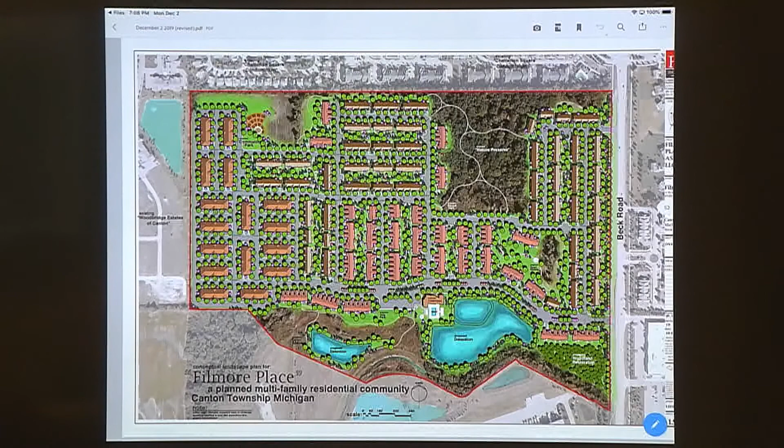There are many wetland areas that are proposed to be modified or filled, and therefore a permit will be required from the state. There are many additional wetland areas and densely wooded areas that will be preserved as part of the PDD benefit. At the time that the site plan is proposed, there will be a comprehensive tree survey for the site.

The last item in our letter that I want to note is the fiscal impact. The project sponsor calculates that the estimated value of each unit will be about $160,000 per unit. Our initial calculations of the impact indicate that it will have a relatively neutral impact on the general fund, library fund, police and fire fund, and road improvement fund.

In summary, our recommendation for the preliminary PDD is a recommendation of approval, and we'll be happy to take any questions that you have. Thank you.

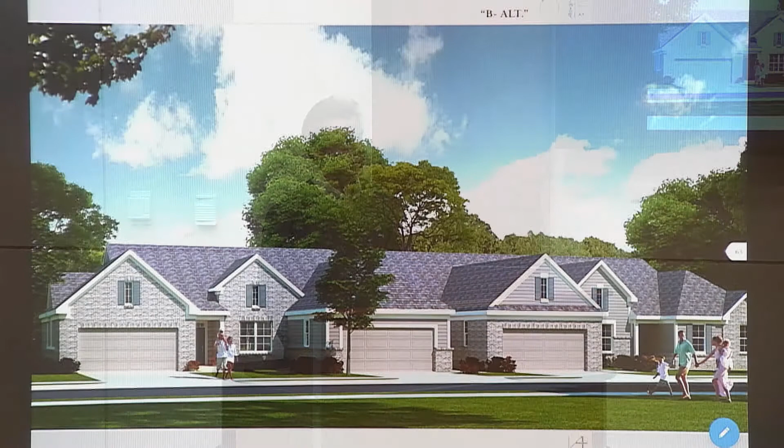You planning any of that up front, or you're just saying you'd look at it if somebody came in and wanted something like that? That's something we'll look at. Universal design, it's something that when you target that market, is an appropriate approach. So as we look at the plans and fine tune them for final design, we'll look at that type of thing.

And these are all ranches, correct? We have, can you just quickly go through the various renderings that we did? Maybe start with the clubhouse, and I'll briefly give you an overview. Two-story buildings too, though, so they're not all ranches. Correct. This is the clubhouse.

This is as you come in off the main drive off of Beck Road. This is going to be the main amenity center for the project. It's going to have a number of different uses within: social room, cyber cafe, lounge. All of the leasing, offices, management, maintenance will be in this large exercise fitness area, yoga on demand, state-of-the-art facility. You can see as far as the architecture, we tried to create different interest along the elevation with different window types, head detailing, gables, and that's carried through on the architecture for the other buildings.

Can you maybe go to one of the ranch buildings? This is one of the buildings you'll see as you come into the project. Most of the initial units along Beck Road are all ranch, and that progresses as you go west back into the project. If you could maybe flip to the next one.

This is our two-story building. This is more in the back of the project, to the west. This has a mix of what we call stacked ranch and townhouses. Predominantly, the center of the building has back-to-back townhouses, but there are stacked ranch in the very center of the building, and then stacked ranch up above the garages, carriage units on the ends of the buildings. So yes, the project is predominantly ranch, but we do have some two-story townhouse units in the rear.

All of the units have two-car garages on the basic ranch units. In this building, we have one-car garages and then two-car garages on the front end corners of the buildings. And as was mentioned, we're looking at least 50% brick. The goal here is to have a maintenance-free, durable product throughout the project. The square footage of the units will range from 1,100 to 1,200 square feet. That's the target market we're looking to hit in terms of the lease-up.

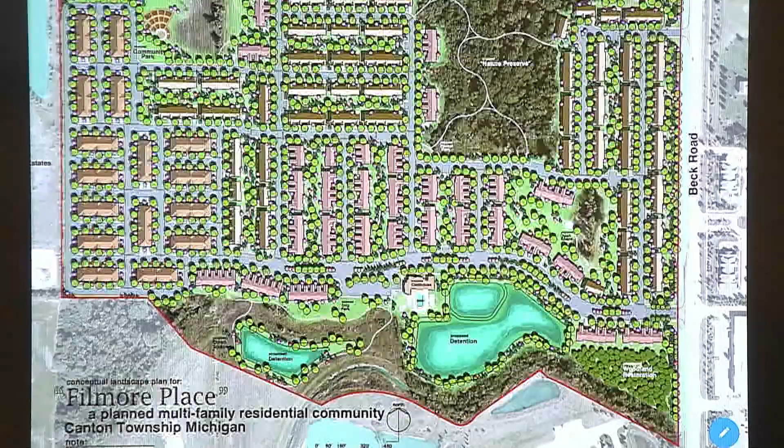The modification for the setback, the wetland buffer, is due to the fact that we've included the buffer area, but in a couple of areas where you've got wetlands that we're actually going to be modifying, we've included that as part of the modifications for the township's purpose. The purpose of the wetland buffer in our ordinance is really to protect the edge of an existing wetland. So when they go to the state and get a permit to modify the wetland, that edge isn't important anymore because you're not protecting it. If the state is modifying the wetland boundary, they're already disturbing that area, so the need to buffer and maintain natural vegetation on the edge is already gone based on the modification pursuant to the permit.

So when we go through site plan, we'll know specifically where those areas are, where they're pushing the wetland boundary back a little bit. They're trying to minimize the amount of wetland they're disturbing so they don't have to mitigate. But in this case, almost just like in Park Creek, we had minor modifications because they have these little fingers of wetlands going through here, and if you took all of the wetland buffer areas around every one of those fingers, you'd end up with a site that wasn't really developable at all.

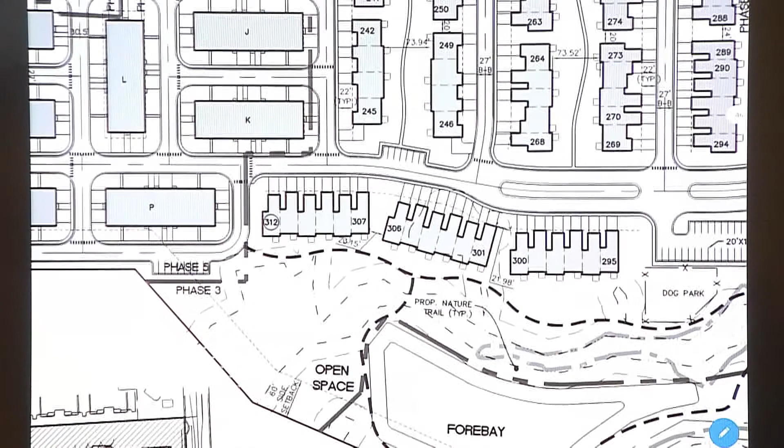What happens - I know we have a lot of wet areas in Canton. Even our yard is wet until probably summer is well underway. So you're doing some wetland setbacks here, and there's a chance of water still getting up to some of those buildings, based on my experience in other parts of Canton. Do you put sump pumps in that area? Are there sump pumps in some of the condos?

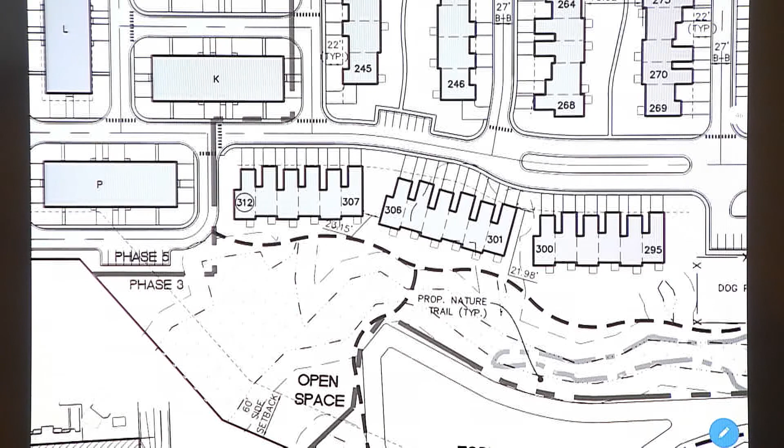All these units are going to be slab on grade, so there are no basements to begin with. One thing we've done is the 100-year floodplain has already been modified and the LOMR is already in place for the Signs Drain on the south side. So we know the elevations for the 100-year floodplain, and we're going to have the units above those elevations. To the north there's some drainage in the back, and we're providing a storm system to pick up any overflows from Woodbridge that may come onto our property, along with drainage from units to the north shedding toward our property. So basically all the finished floor elevations will be above any flood elevations that may exist. And of course, you're going to add detention areas that have to be approved by EGLE.

A couple other questions - so these are going to be private roads, correct? It's all private drives within the apartment complex. This is all rental, so there are just driveways within the apartment complex. So they'd have to pay for their own roads then? Everything will be maintained by the apartment developer.

One other thing, in terms of traffic impact - I know we keep looking at Michigan Avenue and Getty's, and there's going to be a light there for westbound traffic but not eastbound. Is there any way we can keep pushing for that eastbound light? Well, it is both ways - you'll have a light that controls traffic, it'll stop westbound traffic, and it'll allow left turn traffic from eastbound traffic to cross over Michigan Avenue to turn on Beck. That's what the light is for.

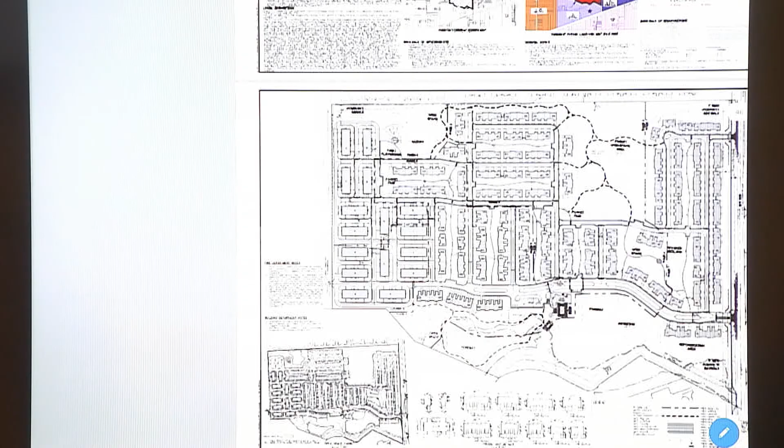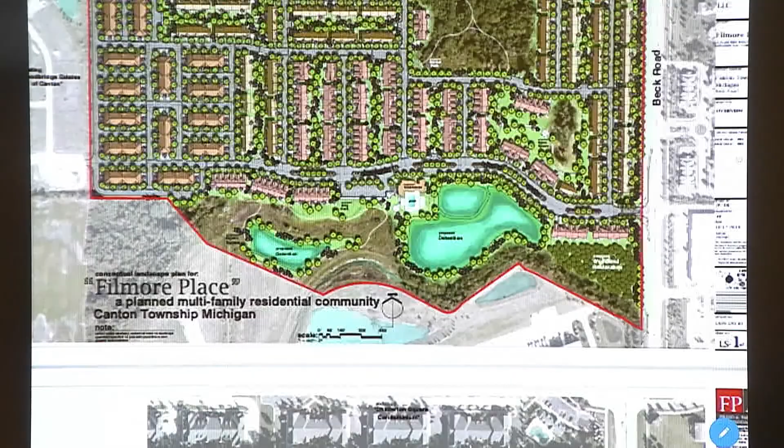But because Beck Road doesn't go through, it's not a four-way light. So you're controlling and allowing left turn movements and probably stopping eastbound traffic. I haven't seen the final light design yet - MDOT's got that probably at 80%. They're probably included in funding for next year's project list in this area. So we're not sure exactly what the geometrics will be, but essentially it is to stop traffic westbound and stop traffic at least partially eastbound to allow left turn movements across Michigan Avenue. Right now you can't turn left to go northbound, and that's really the purpose of the light.

It will also brake traffic going east and west if it's a full signalized intersection. But if it's at Michigan and Beck and you're turning right - I know right now that's where I go sometimes for work. If you turn around there and try to get across to high velocity, some of those parents taking their kids to soccer, it seems to me there'd be even less of a break with this added traffic. Well, right now there's no brake. If there's a light there, it'll brake traffic in both directions.

But they're only putting it on the westbound side. Well, they're putting it in the middle of the intersection so you can turn left. It will stop traffic both ways at Beck and Michigan, that's what I'm talking about. It'll stop traffic both ways, and it'll have a left turn signal to turn left. It's a full light going eastbound and westbound. When it stops, it stops. And it's going to have a left turn phase to allow turns to go north, all the way across, like they do in front of Walmart.

I assume so, but I haven't seen the exact signal design yet. We can check for you. I assume if they're going to put a traffic light in, it's to brake traffic and allow left turn movements. They have to stop the traffic to allow the left turn movements, so they're not going to stop traffic one way and not stop traffic the other way.

Okay, if you could find out, because I heard it wasn't going to be that extensive, that would be good. So the only thing it might not do is stop eastbound traffic in that direction. I don't know why it wouldn't - the only reason would be because there's no opposing traffic coming from the south. I think that's what Anne Marie is saying. That's up to MDOT on how they manage their traffic, and we have no control of that. We'll find out what the design requires.

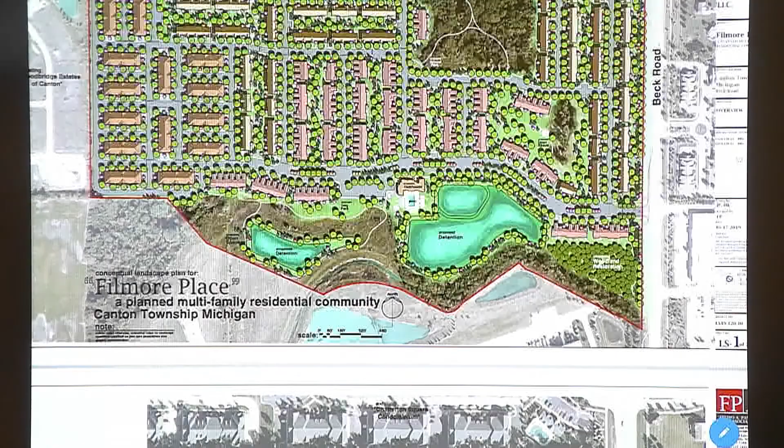Commissioner Engel - no questions, thanks.

Commissioner Zuber: I have some questions about the exterior aesthetics, if I may. I'm sorry, you have to tell me your name again. I know we've met - that's Mark. Mark? Okay, thank you.

On the two-story buildings, if you don't mind going to those first. The brick going up and down - I'll anticipate your question, because Greg was asking me about the brick. I assume you're bringing it down under those roofs just so you don't have to flash that rowlock course above those roofs, like at the porch roof and the bump out for the little window on the first floor? That has something to do with it. It's also just to create interest as you go across the elevation - rather than have one belt line run all the way across, you gain much more interest by bringing it up and down. You can see we've done that throughout on the fronts, sides, and rears.

If you could zoom out just a little bit - up above the oriel window on the second floor, just to the right of those, it looks like you have metal roofing that'll be at a tiny bit of a different slope. Yeah, when you look at it in relationship to that overall 3D, we'll probably do something to that detail to kick it up a little bit more, make it a little bit more prominent so it doesn't look like it's laying flat on the roof. That's what I was going to suggest. All right, thanks.

On the one-story buildings, if you could look at that B alt page, it says at the very bottom right corner, B alt. That is a sheet, it's right there in the middle. Is there anything you could do differently to that bottom elevation on that sheet that would make it so it's not just a bunch of 4 garages sticking way out, and then the entryway? If you look at the plan of those buildings, it looks like the entryway is way back.

This is a series of 4 of what we call our narrower ranch products, and we've tried to minimize that. We've tried to put the wider units as well as the narrower units and intermix those. We can look at the elevation a little bit more, but once again, it's all about trying to mix the product and get it to fit on the site in certain locations.

Absolutely. Plus, this unit and the other unit are going to be very popular from the standpoint of the product in general. I think the elevations in general look really nice, so thank you for that. Great, thank you.

One thing you might do, Mark, on something like this: I know you've modified the roof lines over the garages. You may need to look at the garage door design and differentiate the garage doors a little bit so they don't look all the same when you travel down the street. Could there be some two-door garages, some of them with windows? There are things that we can do. We'll take a look at this.

That's all I had. Commissioner Perkins? I don't have anything, thank you.

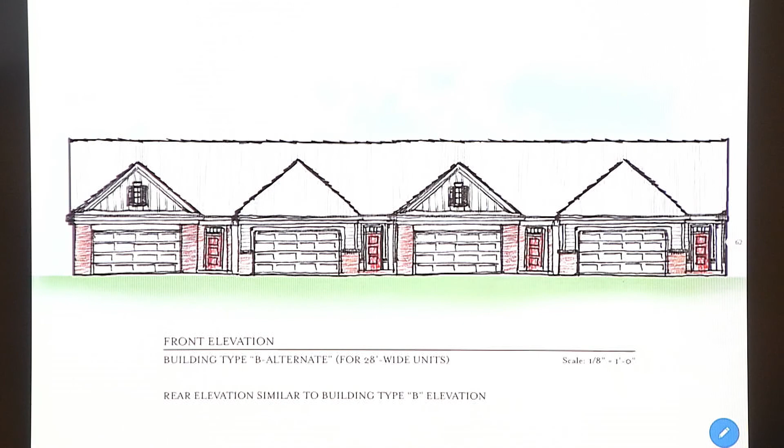Commissioner Eggenberger? I just had a couple questions on, looks like I'm on page 57, and it's talking about the amenities around the area. I see there's a community garden, a fabric canopy area, a dog park, gazebo, a nice little community playground. Is this a done deal, or is this just making it look pretty?

No, this is a done deal. This is what we're striving for. The picture should be representative of what they're proposing. Well, yeah, we're going to do this. I don't know if it's going to be the exact same bike rack, but yes. It's representative of what they're proposing; the actual details will be in the site plan. So you may see the same detail back on the site plan, but they try to get as close as possible to what they were recommending, since they wanted to give you a flavor of what they were intending to do for the project in terms of the level of quality.

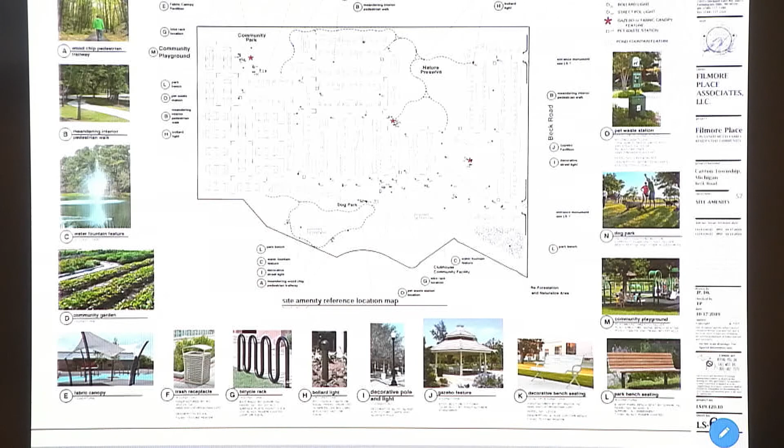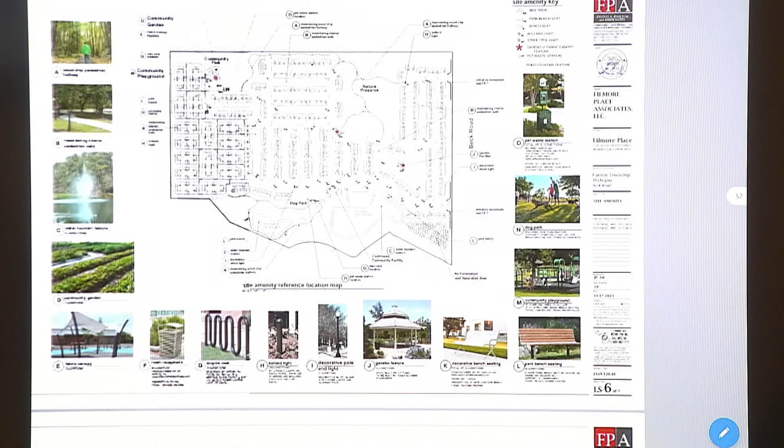There'll be a playground. And then the size of the units? They're roughly 1,100 to 1,200 square feet. Is that the ranches, or is that also the townhouses? I can hear you. Yeah, sorry, I didn't have this on. What I call the narrower and the wider ranch are close to 1,200 square feet.

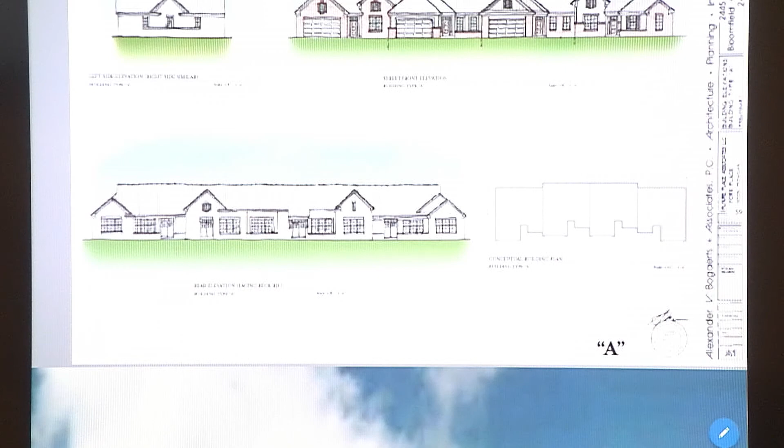Let me get to that in a minute. 1,164 to 1,137, and then the townhouse units, on the upper ranch units, vary from like 1,213 square feet to 1,100 square feet, and the townhouses are like 1,188. So as I mentioned, predominantly they're pushing 1,150 to 1,200 square feet. Okay, thanks.

Commissioner Bennett: Jeff, what is the minimum square footage for housing in Canton? I have it right here, I'll look it up. Depends on the zoning district. For R6 and MR, the minimum is dependent on bedrooms. For one bedroom, it's 650 square feet. For 2 bedrooms, it's 900 square feet. For 3 bedrooms, it's 1,150. So these are all larger than a typical 2-bedroom.

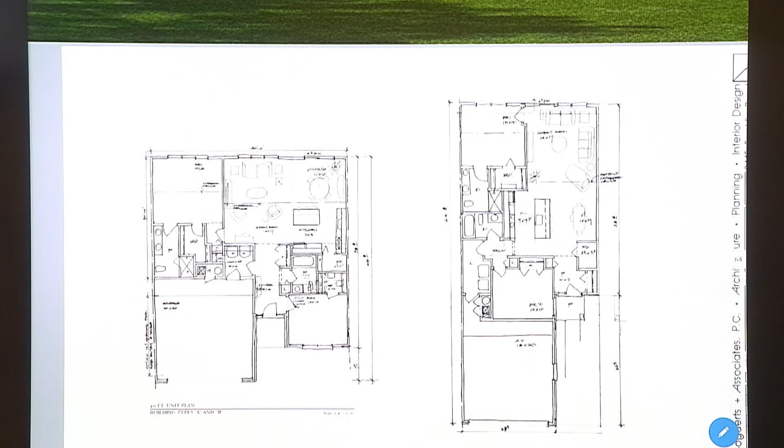Most of these are 2-bedroom apartments, yeah, so they're a lot larger than most 2-bedroom apartments. These are similar to the Redwood apartments you've seen in the past in terms of what they're competing with, the current empty nester product. They want really 2 full master suites, essentially. Each bedroom generally has its own bathroom, or access to another bathroom. So they're pretty sizable, basically condo-sized apartments.

And if they ever came back with additional bedrooms as a modification, they would have to come back for a modification request formally. That's all I had. Commissioner Okun?

Overall, I think everything looks really nice. I like the mix of the single story and the two-story. Architecture looks good. I like how the density is a lot lower than the R6 currently.

My only question was for Jeff: since this is 55 and older, does that have to be stated in the PUD agreement? They're marketing towards empty nesters, they're not age restricting the project. Oh, okay. Similar to Redwood, they think their market in the area is more empty nesters, people moving out of their houses who want something smaller and carefree, but don't want to move out of the community. Thank you.

Are these predominantly or exclusively rental units? Or will there be some that are actually purchased? These will be all rental units.

All rental units, okay. First of all, I do want to commend the project. It's a very large project, and I appreciate the effort put into the design. I want to ask you a couple questions about the amenities. Commissioner Eggenberger touched on them, and I have some questions about the community park, the community garden. What's expected to happen there? Who can use it? Who's going to use it?